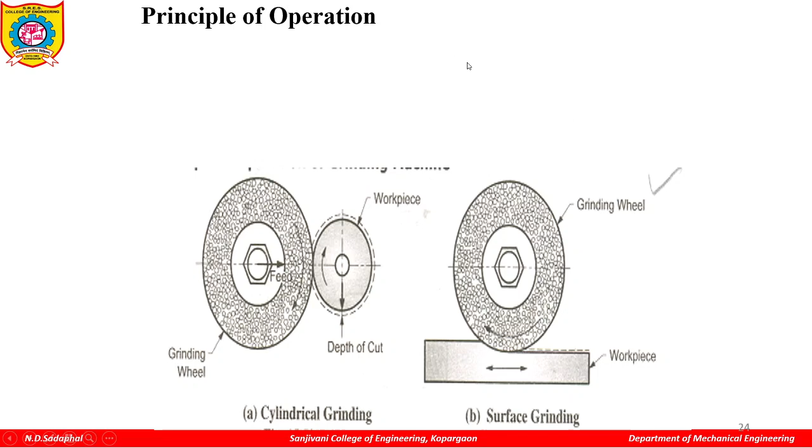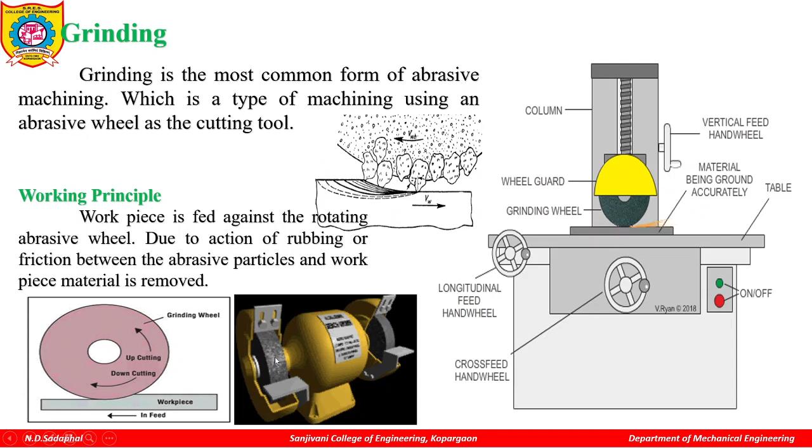First very important point, the grinding wheel is mounted on a spindle which is driven by the motor. Previously you saw a small figure: grinding wheel mounted on a shaft or spindle which is connected to the motor. So the power of the motor is given to the grinding wheel to give it rotating motion.

Then second point, the revolving grinding wheel is brought in contact with the workpiece. So there will be contact between the grinding wheel and your workpiece. Here this is the grinding wheel, this is the workpiece.

Third point, there is a relative motion between workpiece and grinding wheel. The grinding wheel has rotating motion, and the workpiece may have linear motion or rotating motion. The speed of both, the grinding wheel and workpiece, is not the same. If the speed is not the same, it is called relative motion. There will be relative motion between the two components, workpiece and grinding wheel.

Then fine abrasive grains of the grinding wheel. The grinding wheel is made up of very fine abrasive grains, abrasive material, which removes material from the workpiece to give good surface finish and dimensional accuracy.

And the last point is very important: the material removed in this process is very negligible. You have seen the different operations on the lathe machine and drilling machine. The material removed is more in both cases. But this is not a material removing process; it is a process of giving good surface finish and dimensional accuracy. Material removed is very negligible in the grinding process.

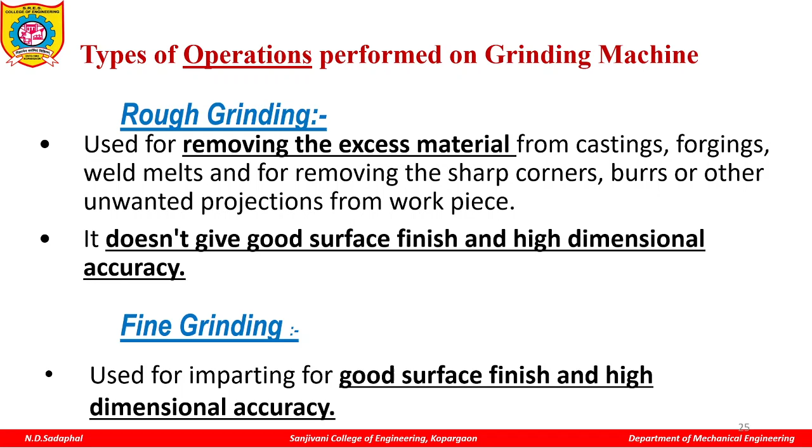The second process is fine grinding. Fine grinding is used to impart a good surface finish and dimensional accuracy. A grinding wheel is used in both cases, but the type of grinding wheel will be different for rough grinding and for fine grinding.

Now two types that we want to see. One is the surface grinding and the other is cylindrical grinding. So what is surface grinding? Again I will go back to the slide. Now if you see these two figures and compare them, your grinding wheel is rotating. This is a grinding wheel rotating in clockwise direction, and your workpiece is also rotating, or it is cylindrical in nature. It is in the cylindrical form.

So when you want to give a good surface finish, or you want to grind a cylindrical part, then that process is called cylindrical grinding. Here both the grinding wheel as well as your workpiece are cylindrical in nature or in cylindrical form. So it is called cylindrical grinding.

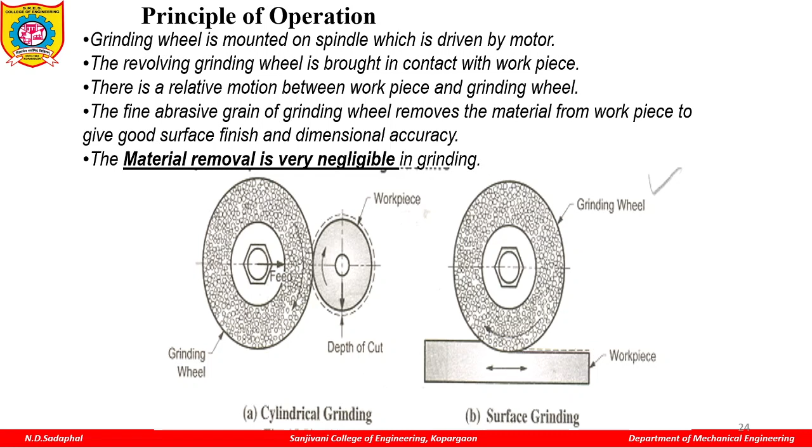Now in the second case, the grinding wheel is rotating and your workpiece, you can see this arrow is shown, is moving in the linear direction, or it is reciprocating. So when you are grinding on a flat surface, then it is called surface grinding. So we'll go to that particular slide, surface grinding.

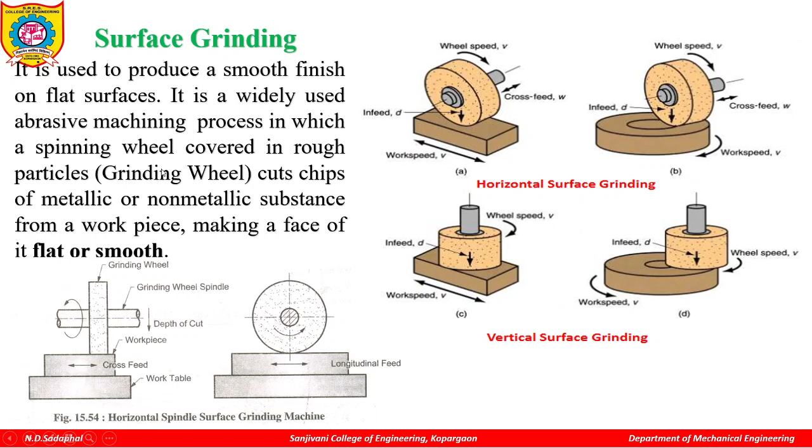Okay, so this surface grinding information is given here, you can read this. Now you can see here the difference between these two. Your workpiece has linear motion. Grinding is done on the surface of a reciprocating workpiece, and here your workpiece has rotary motion, and grinding is done on the rotary surface. So this is called horizontal spindle surface grinding. Same here it is shown.

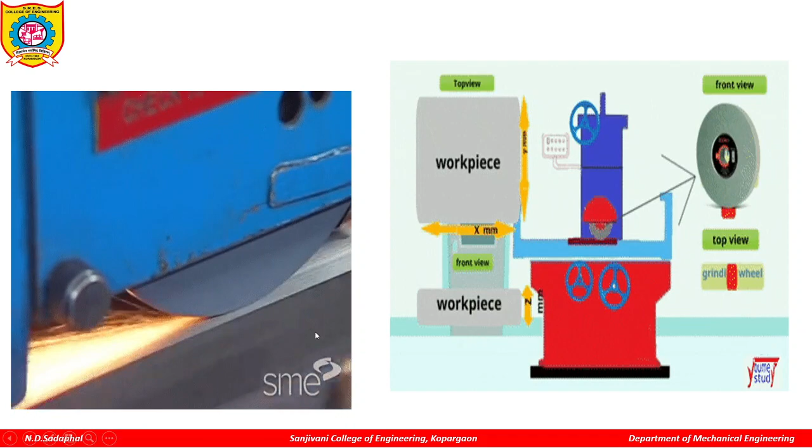The grinding wheel is fed towards and away from the workpiece. If you want to do the grinding process, you have to move the grinding wheel towards the workpiece. Then either the work or grinding wheel is traversed with respect to the other. So the workpiece is moving because you want to grind this total length. You have to move the workpiece from one end to the other end. That is called traversing of your workpiece.

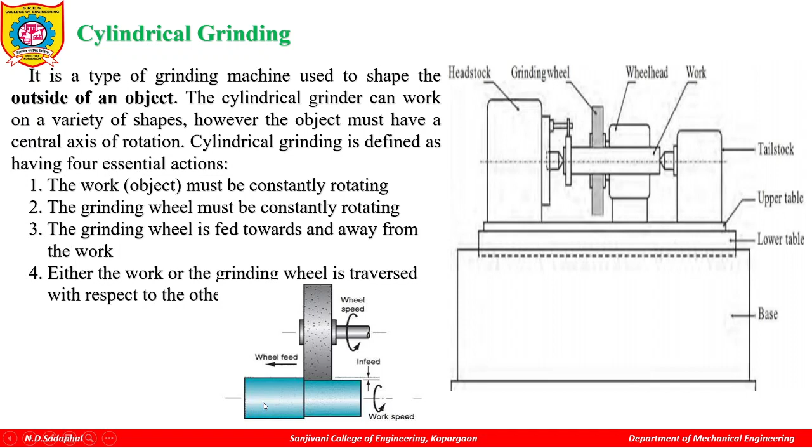You can see here easily. This is a grinding wheel and this is a workpiece. You want to grind this total length. So what do you do? The grinding wheel is stationary, meaning it is at a fixed position. So you have to move the workpiece from one end to the other end. Both are rotating, both are cylindrical in nature. So it is called cylindrical grinding.

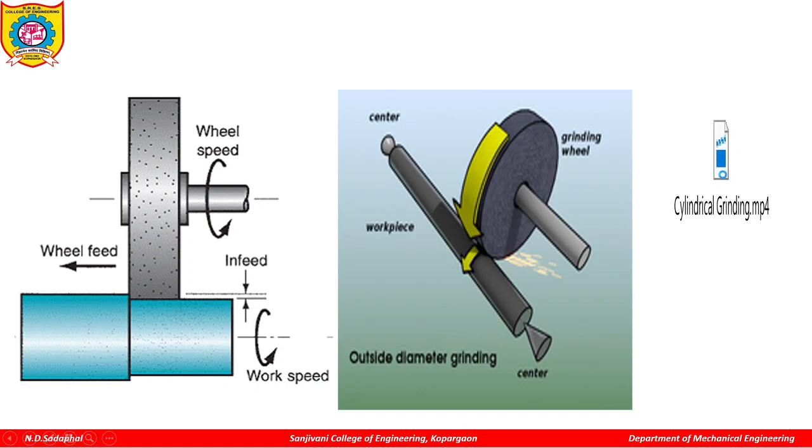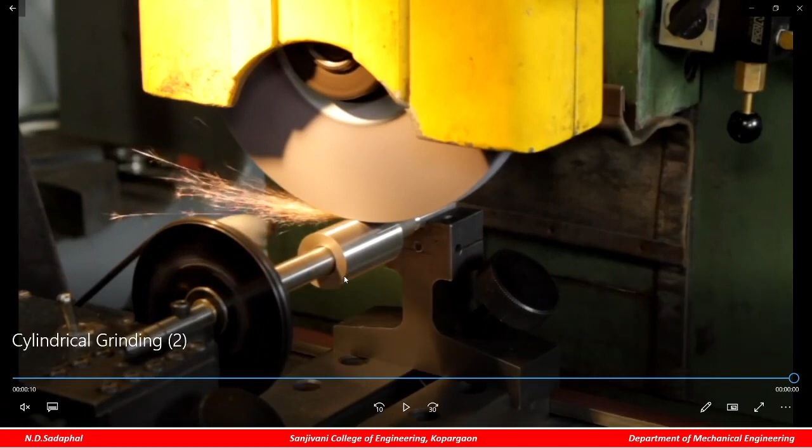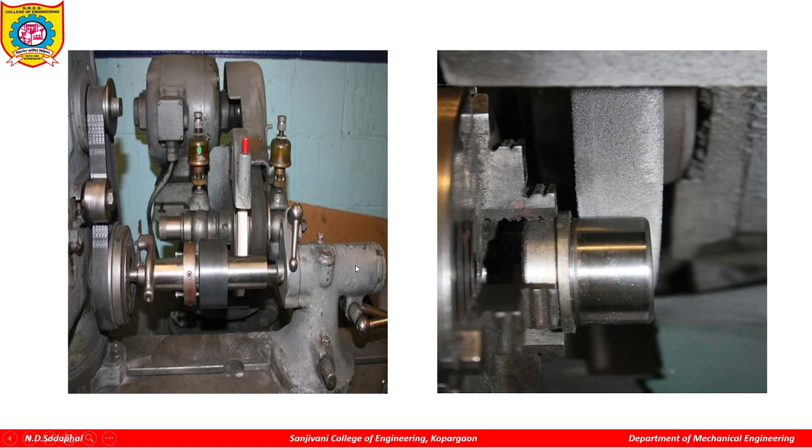Just one video we'll see here of how it can be done. Now you see the sparks, so it's not quite clear. You can see here the grinding wheel is rotating, your workpiece is also rotating. So it is called cylindrical grinding. From one end to the other end, you can see the workpiece is moving. Some images are shown for cylindrical grinding. You can see here also cylindrical grinding.

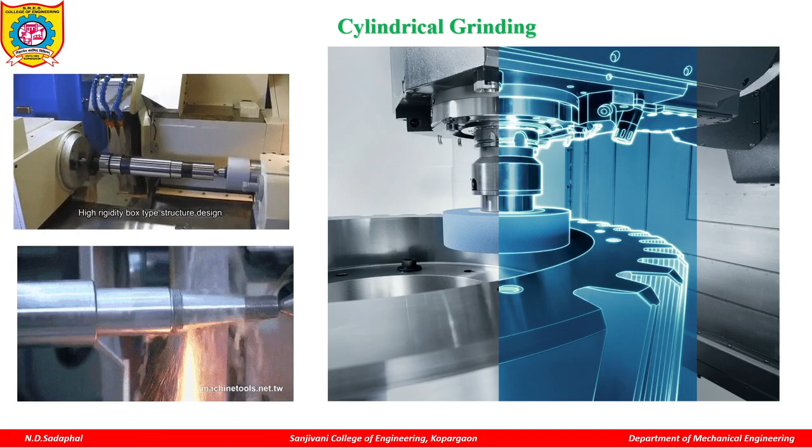So this is how the grinding process works. Now remember one very important point: in the grinding process, material removed is negligible. It is not a material removing process. It is a process of giving good surface finish on the workpiece. Now in the next video we are going to learn about the milling process.